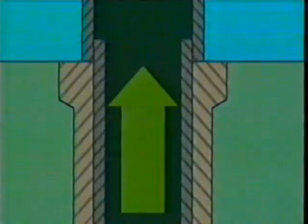As natural gas travels up the wellbore to the surface, it cools due to pressure reduction and conduction of heat to formation walls. When it reaches the surface, the natural gas is usually saturated with water vapor, and additional cooling causes free water to form. Further gas cooling causes hydrates to form, which cause serious equipment damage and flow restrictions.

For successful gas processing, the water must be separated from the natural gas. But how is this done? Well, there are several methods for dehydrating natural gas. However, in this program, we'll examine the operation of a glycol dehydration unit using triethylene glycol.

After the gas and water are separated, the glycol and water must be separated so that the glycol can be reused. The glycol dehydration unit performs a vital function in today's natural gas processing.

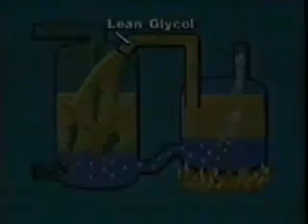To briefly review what you've already learned, glycol dehydration is an absorption process where lean glycol absorbs water from wet natural gas in the contactor column. Next, the water is removed from the glycol through the distillation process in the regenerator. Then the glycol is reused.

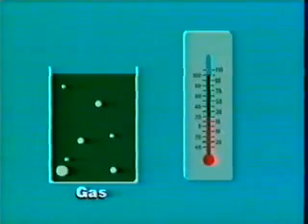Let's also review two important principles of temperature and pressure. At constant pressure, the water content of gas increases as the gas temperature increases. At constant temperature, the water content of gas increases as the gas pressure decreases.

So, let's start with desiccants. A substance that removes water from another substance when the two are brought together is called a desiccant. Glycol is the liquid desiccant in the glycol dehydration process, removing water from natural gas.

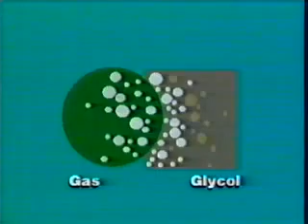Now, there are many types of liquid desiccants used in gas processing. However, in this program, we will only discuss triethylene glycol, or TEG.

Now, TEG is preferred in dehydration units because it is easily regenerated due to its high boiling point and other physical properties. It has a high decomposition temperature of 404 degrees Fahrenheit. It has lower vaporization losses than other glycols, and it has lower capital and operating costs than other glycol systems.

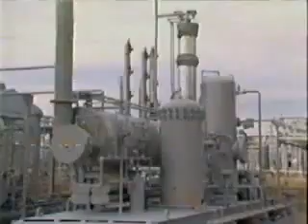To describe a dehydration unit's performance, you can monitor the dew point temperature and dew point depression. Now, dew point temperature, or simply dew point, is the temperature at which natural gas is saturated with water vapor at any given pressure.

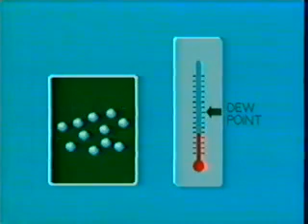When gas is above its dew point, the gas can absorb water. When the gas is below its dew point, water will condense out of the gas. Since natural gas is considered saturated when it leaves the wellhead, the gas is said to be at its dew point temperature.

Dew point depression describes how much water vapor has been removed from the natural gas. It is the difference between the dew point temperature of the inlet gas and the dew point temperature of the outlet gas following dehydration. Now, the actual temperature of the inlet and outlet gas does not change.

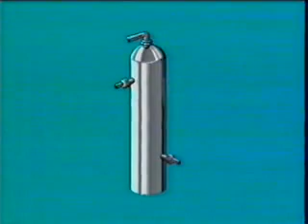For example, if the inlet gas temperature to the contactor is 100 degrees Fahrenheit and it has a dew point temperature of 100 degrees Fahrenheit, and the outlet gas temperature from the contactor is 100 degrees Fahrenheit and it has a dew point temperature of 35 degrees Fahrenheit, then the dew point depression is 100 degrees Fahrenheit minus 35 degrees Fahrenheit, which equals 65 degrees Fahrenheit.

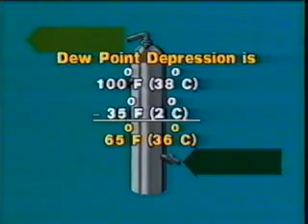The goal in operation is to achieve the dew point depression that meets contract specifications for the water content in gas. Now, several process variables determine the degree of water removal in any glycol dehydration unit.

The variables which affect the unit's efficiency are inlet gas temperature, inlet gas pressure, gas flow rate, inlet glycol temperature, glycol concentration, and glycol circulation rate.

The temperature of the incoming gas has a significant effect on the water content of the gas entering the contactor. Remember, at constant pressure, the water content of the inlet gas increases as the gas temperature is increased. The more water vapor that the gas contains, the more water must be removed by the unit to reach the desired water content of the outlet gas.

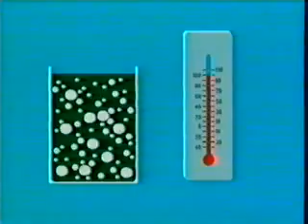For example, at 1000 psig inlet pressure, changing the gas temperature from 100 degrees Fahrenheit to 120 degrees Fahrenheit will double the amount of water vapor that will be carried by the saturated gas. The inlet gas temperature range for successful glycol dehydration is between 60 degrees Fahrenheit up to 100 degrees Fahrenheit. Inlet gas temperatures above 130 degrees Fahrenheit make normal glycol dehydration almost impossible.

In cold weather, line heaters heat the gas stream ahead of the dehydration unit to maintain a minimum inlet gas temperature of 50 degrees Fahrenheit. Minimum inlet gas temperature is set by the viscosity of the glycol being used. Depending on the composition and pressure of the gas, hydrates may form at temperatures well above 50 degrees Fahrenheit.

Therefore, a higher inlet gas temperature is required to avoid plugging problems from hydrates. Now, low inlet gas temperatures increase the tendency of glycol foaming. As you will see later, foaming creates significant operating problems. Now, in the normal operating range of a glycol dehydration unit, inlet gas pressure is not a critical factor.

However, at constant temperature, gas can hold more water as the pressure is reduced. Therefore, operating the unit with a higher inlet gas pressure will lower the water content of the gas.

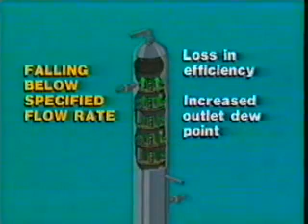For a unit to operate efficiently, the gas flow rate must be maintained in a specific range. Now, if the flow rate falls outside these limits, either higher or lower, problems can develop. Falling below the specified flow rate causes a loss in efficiency and may increase the outlet gas dew point, depending on the design of the trays or packing in the contactor column.

If the flow rate rises above the specified range, reboiler overload occurs. When the reboiler is overloaded, insufficient glycol regeneration and increased outlet gas dew point result. The amount of glycol carried out with the dry gas also increases. If the gas flow rate is high enough, all the glycol can be carried out of the contactor at one time.

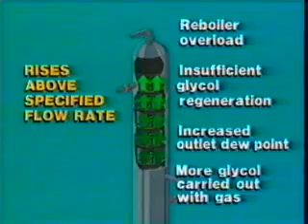A smooth flow rate without rapid surges or changes prevents a loss of seal in the contactor downcomers. Seal loss allows gas to bypass the trays and causes high outlet gas dew points and high glycol loss with the outlet gas.

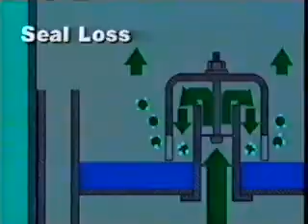A glycol inlet temperature of 10 degrees to 15 degrees Fahrenheit higher than the inlet gas temperature prevents hydrocarbon condensation in the glycol. Hydrocarbon condensation increases foaming, increases carbon buildup on the reboiler fire tube, and reduces carbon filter life.

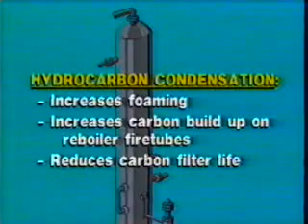The process variable with the greatest effect on dew point depression is the degree of glycol reconcentration, also known as glycol purity. Higher dew point depressions can be obtained with higher glycol concentrations. However, stripping gas must be used to achieve these levels of glycol purity.

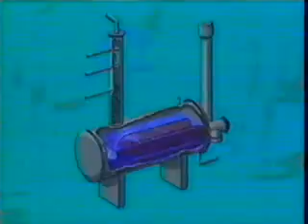Stripping gas is natural gas percolated through glycol being regenerated, to help remove the water that cannot be removed by the distillation process. In some systems, the gas is percolated through the glycol inside the reboiler. In other systems, there is a stripping column located between the reboiler and the surge tank.

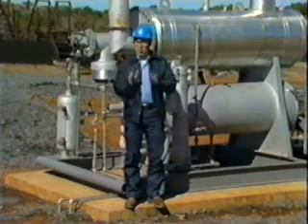If the glycol circulation rate is increased without changing other variables, the outlet dew point will be decreased. However, to produce the desired outlet gas dew point, you should use the lowest glycol circulation rate possible, because an excessive glycol circulation rate can cause the following problems: an increase in fuel consumption, an exceeded reboiler capacity, an increased overhead glycol loss due to the higher temperature of lean glycol going to the contactor, and an increase in pump maintenance.

And that wraps up this section. In it, we discussed the importance of dew points and dew point depression, and saw how variables in the process affect the efficiency of the glycol dehydration system.

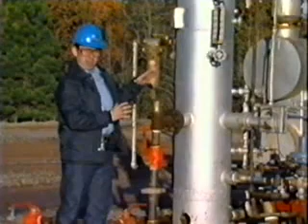Let's start with the inlet separator. Now the inlet gas stream first enters the dehydration unit through an inlet gas separator. Here, free liquids in the gas stream are removed. Wet gas leaves the separator through a mist eliminator, which eliminates almost all carryover of free liquids to the contactor column.

The inlet separator should be checked regularly. Overloading the inlet separator causes excessive liquid carryover into the contactor column, which causes foaming. Therefore, for proper operation, it is important to routinely monitor liquid levels and their controls.

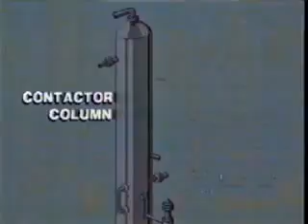The function of the contactor column, also called an absorber, is to remove water vapor from natural gas by physically bringing together the upflowing natural gas with the downflowing glycol solution. The glycol absorbs the water vapor from the natural gas.

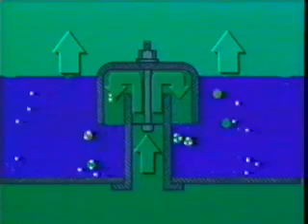Contactor columns are designed to accommodate a certain gas volume and pressure. If these design specifications are exceeded, then glycol losses and outlet gas dew point will increase.

Contactor columns usually contain either tray, random packing, or structured packing. For a large volume of gas, the contactor is usually a tray column consisting of 4 to 12 trays. The greater the number of trays, the more moisture can be removed.

Each tray has openings with bubble caps bolted over them. The upflowing gas is forced through these caps and bubbles evenly through the downflowing glycol. The gas gives up water and becomes drier as it passes upward through each succeeding tray. The glycol becomes more saturated with water as it flows downward over each tray.

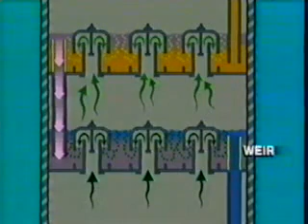Weirs, which are dam-like devices, maintain the level of glycol above the slots in the bubble caps. The downcomers carry the glycol to the trays below.

In smaller capacity units, contactors having a diameter of 18 inches or less, random packing may be used instead of trays. This packing is metal, like these, or it could be plastic or ceramic structures. These structures provide a large surface area for the glycol solution to spread out and make better contact with the gas. Random packing is poured into the contactor onto a support grid.

4 feet of packing is usually standard and sufficient to achieve dew point depressions up to 55 to 65 degrees Fahrenheit. If higher dew point depressions are needed, additional packing may be required.

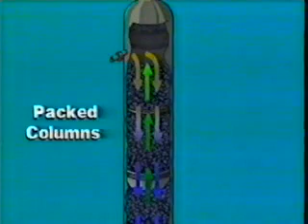Packed columns utilize the same process as tray columns, where liquid glycol flows down over the packing and the gas flows up through the packing. Packed columns are less expensive. However, they tend to channel and have poor flow distribution.

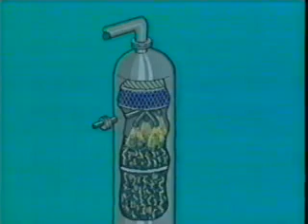Channeling is when the liquid glycol flows in streams throughout the random packing. Channeling limits the surface area where the glycol and gas come into contact. To ensure that gas and glycol mixing will be continuous throughout the packing and the glycol will not channel, a well-designed glycol distribution header is installed above the packing.

Contactors being designed today may contain structured packing. Structured packing is a group of corrugated metal sheets welded into a specific pattern and placed on edge in the contactor. Glycol coats these sheets and the gas flows between them.

This type of packing is more efficient than bubble caps or random packing. Structured packing is used in columns from 6 inches in diameter up to 10 feet in diameter.

Before the lean glycol enters the contactor, two things happen. The glycol is pumped up to the contactor pressure, and the glycol temperature is lowered to within 10 to 15 degrees of the inlet gas temperature. Remember, it's best to have the glycol enter the contactor 10 to 15 degrees warmer than the inlet gas to eliminate condensation of hydrocarbon vapors.

The lean glycol passes through a heat exchanger where it is cooled by the dry gas leaving the contactor. The glycol gas heat exchanger is sized to give the correct glycol temperature and usually does not require attention.

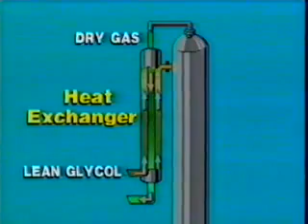Glycol entering the contactor at incorrect temperatures indicates an imbalance in the glycol to gas flow rate, a fouling problem in the heat exchanger, or that the reboiler temperature is out of adjustment.

Above the top tray, a mist eliminator in the top of the contactor will remove any entrained glycol particles in the gas stream that have not settled out. This prevents liquid glycol from being carried out of the contactor and into the gas discharge line, commonly referred to as carryover.

Carryover occurs when glycol contamination causes foam buildup. Carryover also happens when the gas rate is high enough to agitate the liquid on the top tray so that a foam forms that is too thick for the mist eliminator to handle. The gas rate must be reduced to eliminate carryover.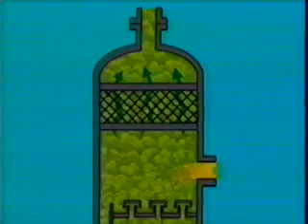Glycol level control on the contactor is important in stabilizing unit operation. The level controller should be adjusted to hold a uniform flow rate of glycol out of the contactor. It is more important to hold a constant flow of glycol out and let the glycol level in the contactor vary a few inches than to hold a constant level in the contactor and let the flow out fluctuate.

Flow rate surges leaving the contactor will cause the reboiler to operate inefficiently and may overload it.

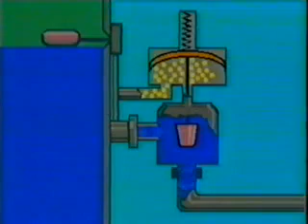The gas condensate glycol separator, also known as the flash tank or glycol gas separator, recovers gas and liquid hydrocarbons carried out of the contactor by the glycol solution. The gas leaves the top of the vessel and is vented, or may be used to supplement the fuel gas required for the reboiler. A pressure control valve maintains a back pressure on the vessel, usually 50 to 85 psig. Any excess gas is discharged through this back pressure valve.

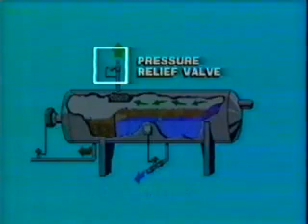Separating liquid hydrocarbons from glycol before they enter the reboiler provides several benefits. It reduces the load on the carbon filter, prevents carbon from building up on the reboiler fire tube, and prevents glycol contamination in the still column, which can result in flooding, glycol loss, and possible damage to the column.

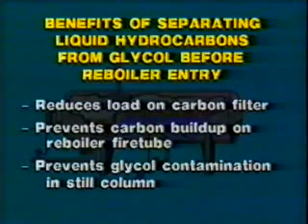Two-level control systems are typically installed on gas condensate glycol separators. The upper system regulates the flow of liquid hydrocarbons discharged from the vessel, and the lower system regulates the flow of glycol from the vessel.

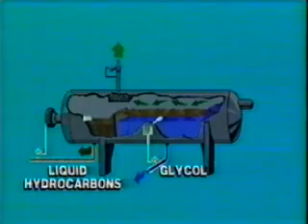Filters are installed in the glycol stream to remove solids and other contaminants which may cause plugging and foaming. There are two types of filters commonly used in gas dehydration systems: one for solids removal, and the other for dissolved contaminants removal.

For solids removal, fine screens, sock type, or cartridge filters are used. Solid particles cause erosion of pump pistons, valve seats, and discs, plugging of equipment, and foaming.

Sock filters are the most commonly used type of solids removal. Sock filters contain cylindrical elements that are replaced as they become coated with solids.

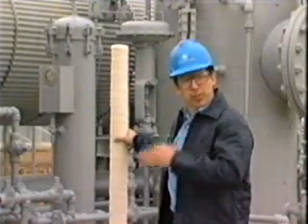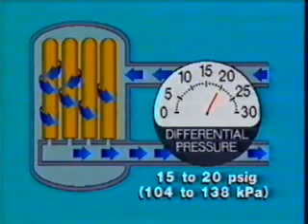A differential pressure gauge measures the pressure drop across the elements. A pressure drop of 3 to 6 psig is normal as glycol flows through the elements. The pressure drop increases as the elements remove solid material and eventually become plugged. When the pressure differential becomes 15 to 20 psig, the elements should be replaced to prevent stoppage of the glycol flow and possible collapse of the elements.

For removal of dissolved contaminants, activated carbon filters are used. When the glycol contains measurable quantities of heavy hydrocarbons, the carbon filter must be changed or reactivated frequently. Most glycol systems cannot be operated successfully without carbon adsorption.

There are two types of activated carbon filters. Small systems like this one use a carbon canister with replaceable cartridges. Larger systems use a loose-fill carbon vessel that uses granular activated carbon.

When the loose-fill vessel is used, carbon particles, sometimes called fines, must be trapped to keep them from entering the glycol dehydration unit. This is especially important when a fresh carbon bed is put into service. Anytime the level of contaminants in the glycol increases, the carbon filter should be replaced. Monthly tests should be run to determine contamination level.

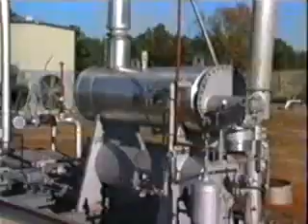The regenerator is a combination of the glycol reboiler and the still column. They work together to regenerate the rich glycol, making it lean again and ready to use in the contactor column.

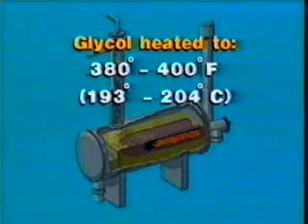The reboiler supplies heat to separate glycol and water by simple distillation. Glycol is heated to a temperature between 380 degrees and 400 degrees Fahrenheit to remove enough water vapor to regenerate the glycol to 98.5 to 99%. The temperature of the triethylene glycol should not exceed 400 degrees Fahrenheit because TEG will begin to break down at higher temperatures.

Reboilers can be direct fired or heated by steam or hot oil. The direct fired type, containing a removable firebox and fire tube, is normally used. An overflow weir maintains the glycol level in the reboiler. Excess glycol spills over the weir and flows downward into the surge tank by gravity. When the glycol level is low in the surge tank, fresh glycol is added to the reboiler, so it can be dried before going into the surge tank.

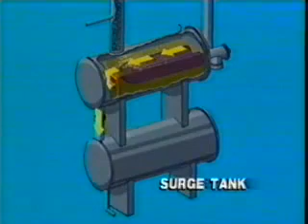This still column, or stripper, located just above the reboiler, is where the actual distillation of water from the glycol takes place.

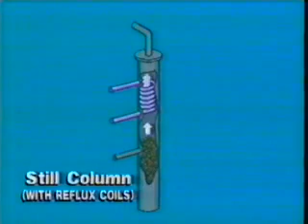Still columns are normally packed columns and have fin condensers or reflux coils in the top. These condensers, or reflux coils, cool water vapor leaving the column and recover entrained glycol. The amount of glycol lost with the water vapor leaving the still column is controlled by the temperature of the water vapor. This temperature, called the still overhead temperature, should be set at the boiling point of pure water.

Normally the pressure will be atmospheric, 14.7 psia at sea level, and the temperature will be 212 degrees Fahrenheit. Systems operating above sea level will require lower temperatures due to lower pressures. Systems with back pressure will require higher temperatures.

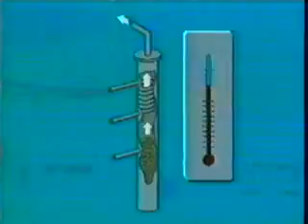If the still overhead temperature is above the boiling point of pure water, glycol carryover is the result, and losses will be higher than normal. If the still overhead temperature is below the boiling point of pure water, too much water will be condensed back into the glycol. This will cause both the reboiler heat requirements and fuel usage to increase.

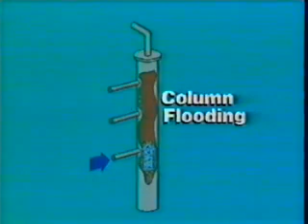When the glycol flow rate exceeds maximum design limits, a condition known as column flooding occurs. Column flooding is when the still column fills with liquids. This occurs when the glycol being fed to the still column has a high concentration of light hydrocarbons. These hydrocarbons distill out of the glycol and condense in the upper portion of the column.

Column flooding does not allow proper glycol and water separation. Rich glycol can be lost through the vent line when the column floods.

The surge tank stores regenerated glycol for pump suction, and it is commonly positioned under the reboiler. Vapors trapped in the surge tank could cause a circulation pump to vapor lock. Therefore, a vent line is provided to remove these vapors from the surge tank.

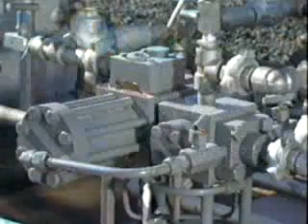Most small dehydration units use a fluid-driven pump, while larger units generally use electrical-driven reciprocating pumps. In either case, the pump is a critical part of the unit because it has the only moving parts in the system. Before the rich glycol enters the pump, it passes through a strainer to remove large particles.

Leaks can be a problem around glycol circulation pumps. Proper packing gland maintenance and the use of the manufacturer's recommended packing can minimize this problem.

There are two types of heat exchangers used to cool the glycol in a glycol dehydration unit: glycol to glycol heat exchangers, like these, and a glycol to gas heat exchanger. Lean glycol leaving the surge tank must be cooled prior to entering the contactor. The cooling allows the lean glycol to absorb the maximum quantity of water from the gas in the contactor.

The heat exchangers are very important in the overall operating efficiency of the dehydration unit. They substantially reduce the amount of heat required by the reboiler and allow a maximum gas drying in the contactor.

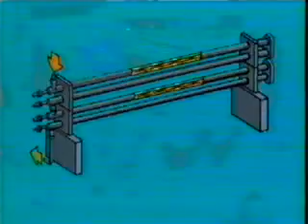The first stage of glycol cooling occurs in the glycol to glycol heat exchangers. These two heat exchangers cool the lean glycol coming from the surge tank at 400 degrees Fahrenheit to a temperature of 212 degrees Fahrenheit. The final stage of lean glycol cooling occurs in the glycol to gas heat exchanger.

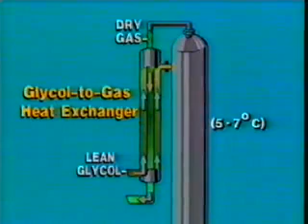Dry gas leaving the contactor passes through the glycol to gas heat exchanger, where it cools the incoming lean glycol to a temperature about 10 to 15 degrees Fahrenheit above that of the natural gas entering the contactor.

On small dehydration units, this exchanger is often a double pipe heat exchanger, which is literally a pipe within a pipe. Lean glycol in the outer pipe flows around outlet gas in the inner pipe.

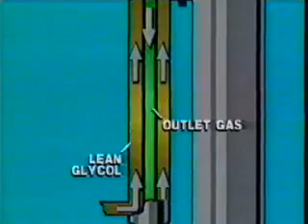Larger units may utilize a shell and tube type of heat exchanger. Taking the temperatures of glycol before and after passage through the heat exchanger tells you what condition the exchanger surfaces are in.

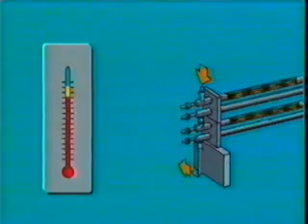As the exchanger surfaces become more severely fouled, the temperature differential across the heat exchanger decreases, meaning that the exchanger isn't as efficient as before. When this occurs, you will need more gas to fire the reboiler.

That wraps up the second section. In it, you saw the individual components that make up the glycol dehydration unit, how the components work together to dehydrate natural gas and to regenerate rich glycol.

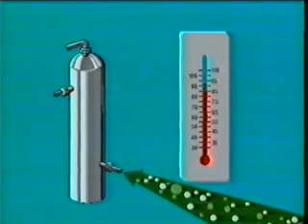In the contactor, the temperatures of the inlet gas and the glycol affect the amount of water removal from the saturated gas. If you recall, at constant pressure, natural gas can hold more water as the temperature of the gas increases. What does that mean? It means if we keep the inlet gas temperature low, the unit will have less water to remove from the gas.

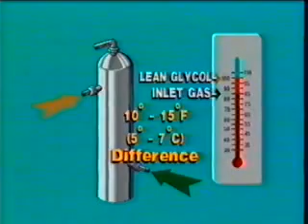You also want to keep that lean glycol temperature down to a minimum when entering the contactor, but still 10 to 15 degrees Fahrenheit higher than the inlet gas. Why? For several reasons: first, warm glycol absorbs water more easily than hot glycol. Secondly, we're trying to keep the temperature of the gas cool, so the incoming gas has less water in it. And thirdly, this helps to prevent hydrocarbon condensation.

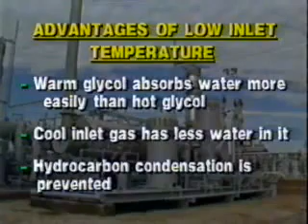Now, the reboiler temperature is important because it controls the concentration of water in lean glycol.

At constant pressure, higher reboiler temperatures result in greater glycol purity. The temperature range for TEG should be set at 380 to 400 degrees Fahrenheit.

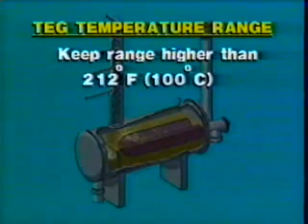We want the range higher than the temperature where water boils, 212 degrees Fahrenheit, so that the water can be removed quickly, but lower than the temperature where glycol degradation begins, 404 degrees Fahrenheit.

Remember what the still column does. It removes water from rich glycol, and it recaptures glycol trying to leave with water vapor.

The temperature range we want to set for the still overhead temperature is between where water boils and where glycol boils. It's easy, because water boils at 212 degrees Fahrenheit, and triethylene glycol boils at 546 degrees Fahrenheit.

Recommended range for the still overhead temperature is 212 to 215 degrees Fahrenheit at sea level. Low still overhead temperature can cause reboiler overload and excessive fuel consumption. High still overhead temperature can cause glycol loss due to vaporization.

Now let's look at operating pressures in the contactor, regenerator, filters, and GCG separator. If you operate the contactor below the proper design pressure, you will have problems.

First, at constant temperature, water content of inlet gas increases as pressure decreases, causing the unit to work harder to dry the gas. Secondly, at constant gas rates, the gas velocity through the contactor increases as the pressure is decreased, causing carryover problems.

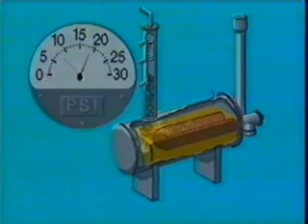Regenerator pressure will build up if there's a plugging or flooding problem in the still packing. An increase in regenerator pressure prevents some water from boiling out of the glycol, requiring higher temperatures in the reboiler. This wastes fuel gas and can lead to glycol degradation.

As far as your filter goes, a pressure drop of 3 to 6 psig is normal as glycol flows through the elements. The pressure differential increases as the elements become plugged. Replace the filter elements when this differential increases to 15 to 20 psig.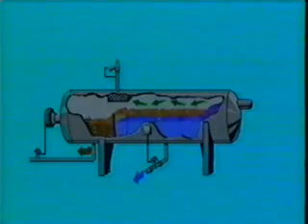Operating pressure in the gas condensate glycol separator is 50 to 85 psig. Back pressure is maintained by a pressure-controlled regulator.

Now that you understand the various temperature and pressure interrelationships, you should be able to prevent costly operating problems such as high glycol losses, foaming, and corrosion.

To really operate efficiently, you've got to minimize your glycol losses. Losses occur due to vaporization, entrainment, and mechanical leaks.

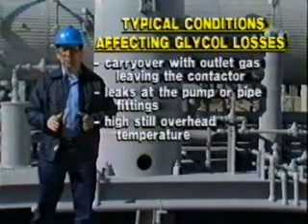Typical conditions which affect glycol losses include carryover with outlet gas leaving the contactor, leaks at the pump and pipe fittings, high still overhead temperature, the contactor column operating at excessive gas rates, foaming, and rapid changes in the gas rate. But how do you know if you're operating efficiently or not?

You take glycol samples in the field, have a laboratory test them, interpret the results, then you make the necessary adjustments to reach maximum drying efficiency.

You can find out a lot by analyzing the glycol. It can tell you glycol weight percentage, water content, hydrocarbon content, salt content, solids content, pH of the glycol, iron content, and foaming tendencies. Let's look at a lab analysis from a typical glycol dehydration unit and see how efficiently we're operating.

The glycol weight percentage refers to the amount of glycol in the glycol solution, also known as glycol purity. Lean glycol should contain about 98.5 to 99% glycol.

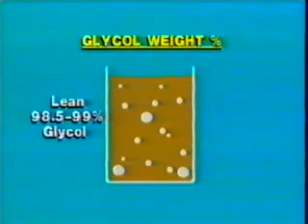Rich glycol content varies from about 93 to 96% glycol. Looks like our rich glycol sample is in the acceptable range, but the lean glycol is outside the acceptable range. This means there may need to be some adjustments made.

Water content refers to the amount of water in the glycol solution. Low water content in lean glycol is vital to good dehydration. The water content in lean glycol should not exceed 1.5%.

If the water content exceeds 1.5%, then the reboiler temperature is too low and or a heater is not working properly. The water content in rich glycol should not be more than 5 or 6%.

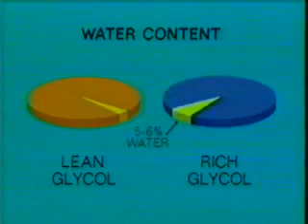Let's take a look at our sample. The water content for the rich glycol is acceptable. However, the lean glycol water content is too high. Again, this means that some adjustments may need to be made.

Water content spread refers to the difference in water content between lean and rich glycol. A spread which is too narrow, 0.5 to 2%, usually means the glycol circulation rate is too high. The rate should be lowered to save energy, minimize glycol losses, and improve dehydration.

A spread over 4 to 6% is too wide, and usually means the glycol circulation rate is too low and should be increased. The water content spread between our samples, approximately 3%, falls in the acceptable range. A good guideline for circulation rate is, for every pound of water to be removed, use 3 gallons of glycol.

Hydrocarbon content refers to the amount of oil, paraffin, or condensate in the glycol. Keep it below 0.1%. Otherwise, problems such as foaming, plugging, or fouling will cause glycol loss and poor dehydration of the gas. The hydrocarbon content in our samples is below the range.

Hydrocarbons get into the glycol in two ways: by condensing in the contactor when the glycol is colder than the incoming gas, and by carryover of hydrocarbon contaminants from the inlet separator or gas stream if the unit has no separator.

Salt content refers to the amount of salt or chloride in the glycol. It should be kept below 0.01% by weight, or 100 parts per million. Problems occur when the salt content reaches almost 0.1% by weight, or 1,000 parts per million. These problems include a buildup of salt on the reboiler fire tube, resulting in decreased heat transfer efficiency, corrosion, which will eventually decay the fire tube, and hot spots on the fire tube, resulting in thermal decomposition of glycol and holes in the fire tube.

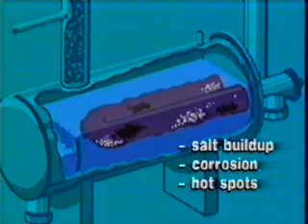Although the salt content of our samples is a little high, it is still in an acceptable range. Salt usually travels in the gas stream in a fine mist. Now, if the gas stream contains excessive salt, a coalescing or filter-type separator can be used to remove salt from the gas upstream of the dehydration unit.

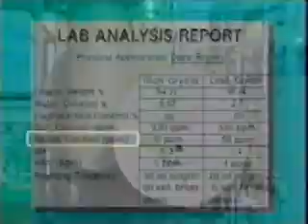Solids content refers to the amount of suspended solids in the glycol. Suspended solids should be kept below 0.01% by weight using filtration. High solids content in glycol cause the following problems: increased pump wear from abrasion, accelerated corrosion and erosion, increased fouling of the fire tube, increased glycol loss due to foaming, and increased plugging problems.

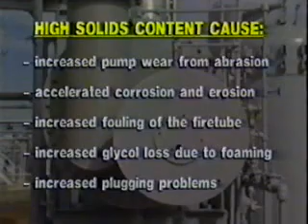The solids content of our sample seems to be in the acceptable range.

pH refers to the corrosiveness of glycol. pH is a term used to express acidity or alkalinity. It is based on a 0 to 14 scale. 0 to 6.9 is acidic, 7 is neutral, and 7.1 to 14 is alkaline. A pH of about 7.3 is considered a safe operating level.

As glycol pH decreases, the equipment corrosion rate increases rapidly, and troublesome corrosive compounds result. Raising the pH above 8 to 8.5 is not desirable because a more alkaline glycol solution tends to foam and emulsify easily.

In our sample, the pH of the lean glycol is acceptable at 7.4, but the pH of the rich glycol is too acidic. Check the pH of the glycol periodically and keep it on the alkaline side by neutralizing the acid compounds with alkaline chemicals.

Iron content refers to the amount of corrosion products in the system. Rust is the most common. Corrosion products either come in with the incoming gas or they are the result of a corroding glycol system. If the iron content exceeds 10 to 15 parts per million, then corrosion prevention methods should be considered.

The iron content of the rich glycol at 5 parts per million and lean glycol at 4 parts per million is acceptable.

Foaming refers to the foaming tendency of glycol caused by contaminants. These contaminants in the glycol enter the system as gas entrainment. Water and glycol alone will not cause significant foaming. However, the combination of water, glycol, and oil does create excessive foaming.

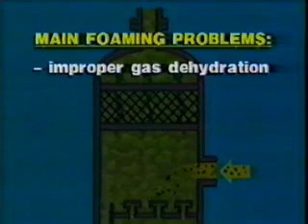The main problems associated with foaming are improper gas dehydration, excessive glycol losses when the glycol foams out of the contactor, and additional equipment problems downstream of the contactor from glycol carryover.

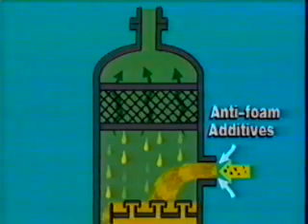Foaming problems can temporarily be corrected by anti-foam additives, which cause the foam to break. The cause of the problem should then be identified and corrected. Improper use of anti-foam additives can increase foaming problems.

The best preventative measure against foaming is the installation of a properly designed inlet gas separator and glycol filtration system. Good glycol filter maintenance and pH control are also very important.

Well, that concludes the third section. In this final section, you saw how important temperature and pressure conditions can be, how to reduce glycol losses, and how glycol tests can pinpoint problem areas.